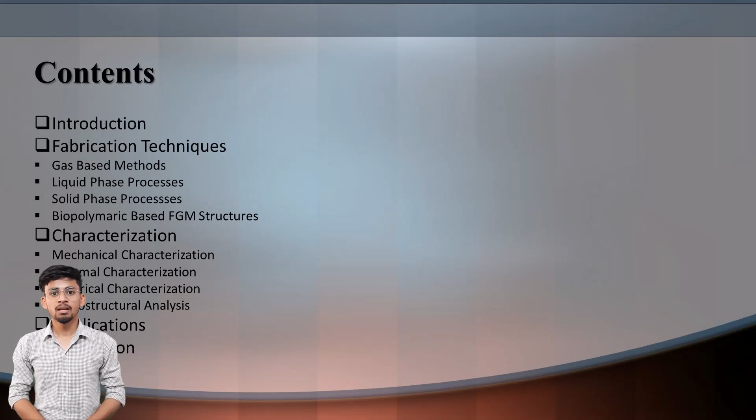Today I am pleased to be here in front of you to deliver the presentation of my seminar topic, fabrication and characterization of functionally graded materials. This is the overview or the list of contents. So let's start with the introduction and know about what functionally graded materials are.

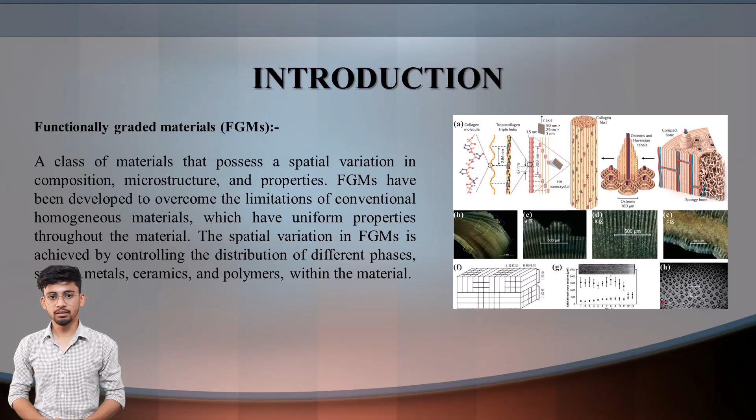Functionally graded material is a class of material that possesses a spatial variation in composition, microstructures and properties. FGMs, or functionally graded materials, have been developed to overcome the limitation of conventional homogeneous materials, which have uniform properties throughout the material. Now let's talk about the fabrication techniques to fabricate functionally graded materials. Mainly these methods are divided into four categories: gas-based method, liquid-based method, solid phase process and biopolymeric based functionally graded structures.

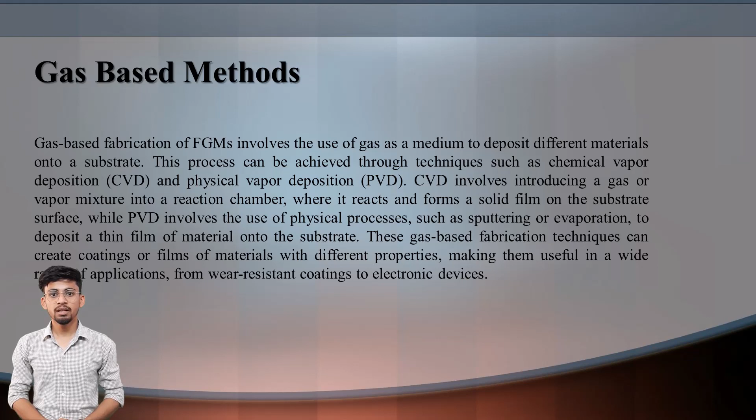So the first method is the gas-based method. In this method, the fabrication of FGM involves the use of gas as a medium to deposit different materials on a substrate. The process can be achieved through techniques such as chemical vapor deposition, thermal spray and surface reaction process. These gas-based fabrication techniques can create coatings or films of materials with different properties, making them useful in a wide range of applications, from wear resistance coatings to electronic devices.

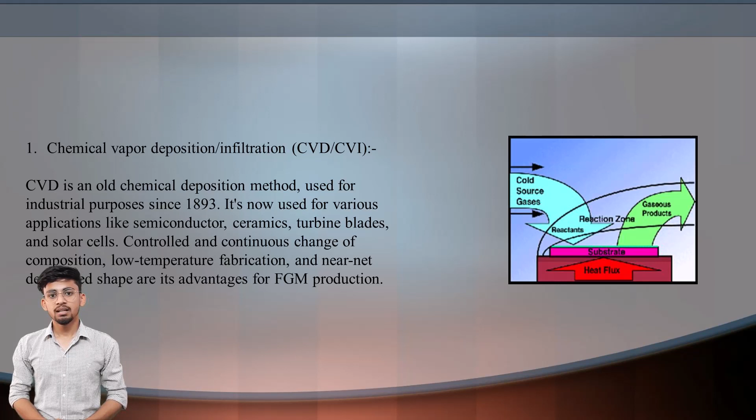Now, the first gas-based method is chemical vapor deposition or chemical vapor infiltration. This is an old chemical deposition method used for industrial purposes. It's now used for various applications like semiconductors, ceramics, turbine blades and solar cells, etc. Now the second method is thermal spray. It has a long history and is used for high temperature coating. Different materials and techniques can be used, including cold spray and functionally graded thermal barrier coating.

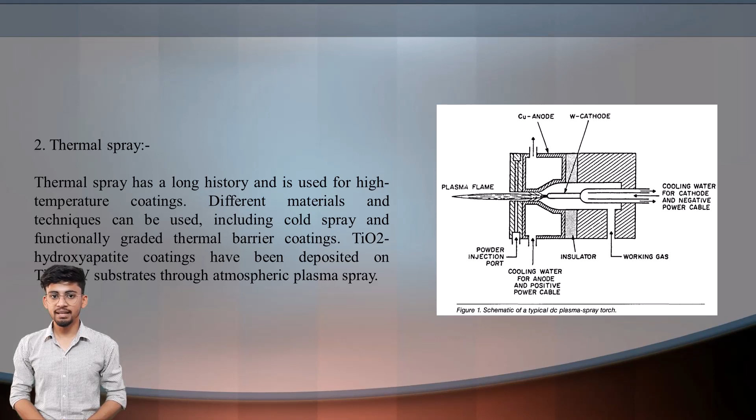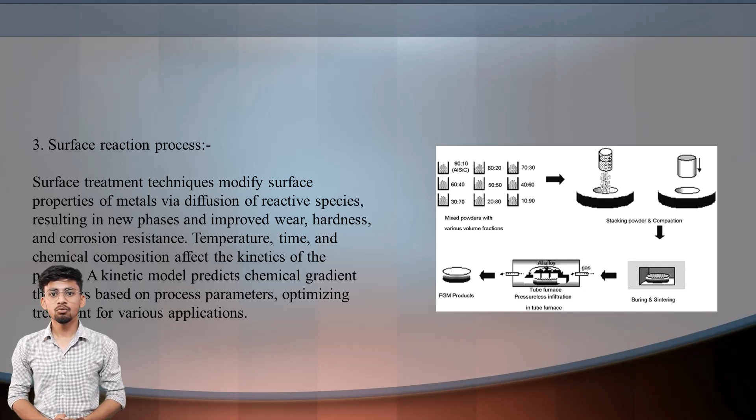The next gas method is the surface reaction process. Surface treatment techniques modify surface properties of metals via diffusion of reactive species, resulting in new phases and improved wear, hardness and corrosion resistance. After the gas-based method, the next method is the liquid phase process.

The liquid phase process is a fabrication of functionally graded material where the material composition varies gradually from one end of the component to the other. In this method, the starting materials are mixed together in the form of a slurry, which is then cast or injected into a mold. The slurry solidifies as it cools, resulting in a component with a gradient of material properties.

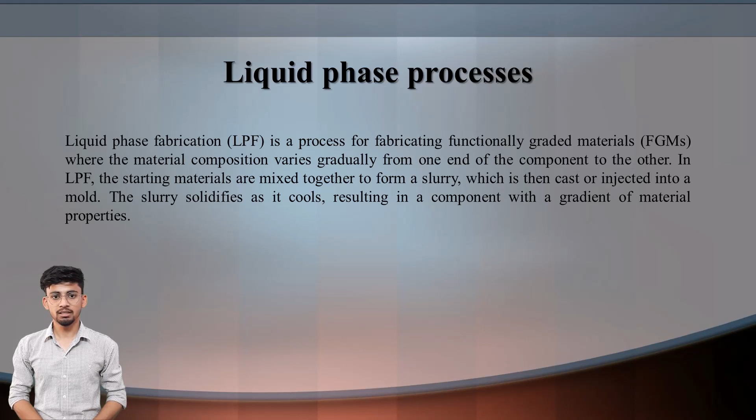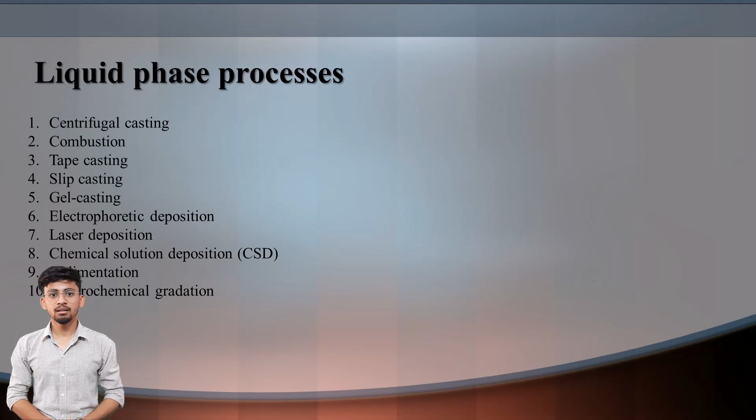Some methods involved in the liquid phase process are shown on the screen: centrifugal casting, combustion, tape casting, etc. As per the properties of the materials and the shape of the desired part, the suitable process is going to be chosen. After the liquid phase process, the next method is the solid phase process.

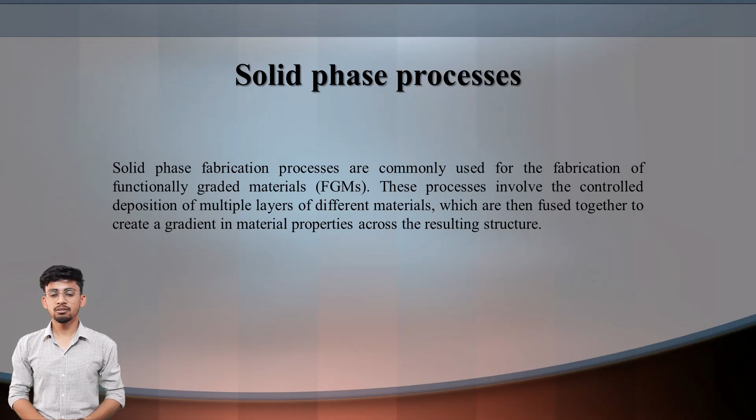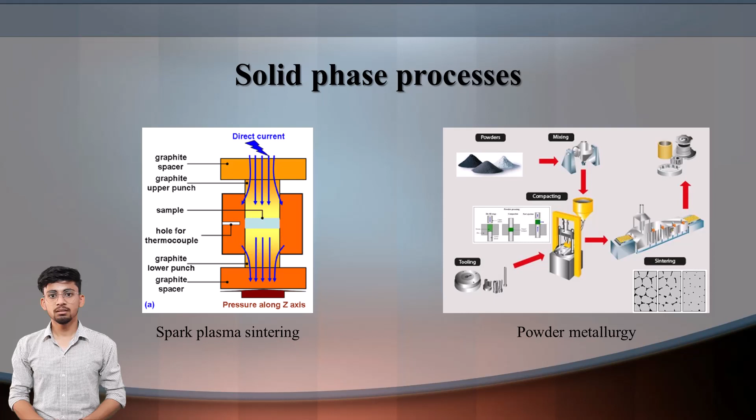This process involves the controlled deposition of multiple layers of different materials, which are then fused together to create a gradient in material properties across the resulting structure. Some methods involved in the solid phase process are spark plasma sintering and powder metallurgy. Powder metallurgy is a widely used method in industries.

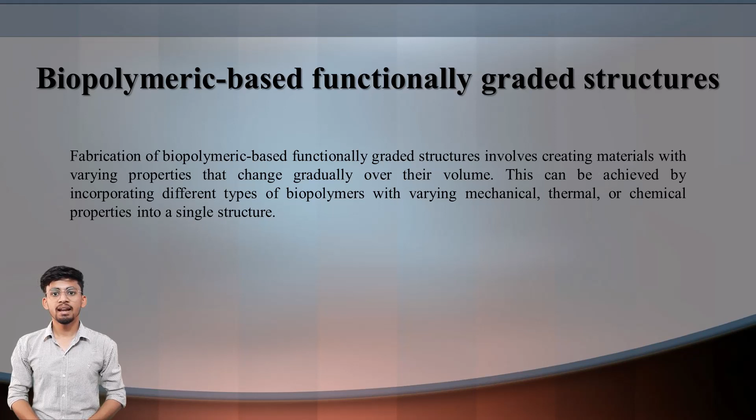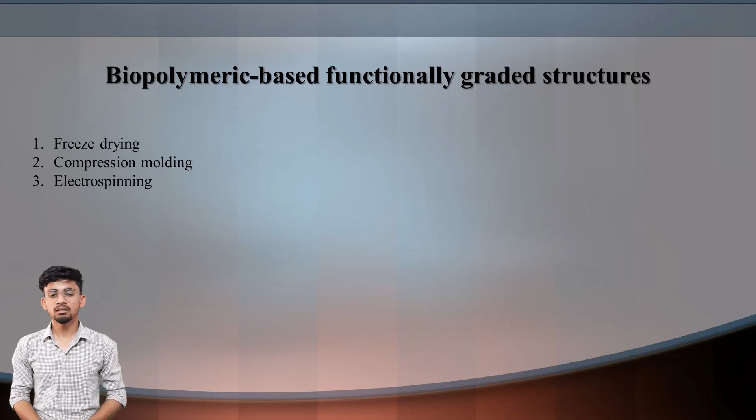Now the last method is biopolymeric based functionally graded materials. The fabrication of biopolymeric based functionally graded material structures involves creating materials with varying properties that change gradually over the volume. Some methods to create biopolymeric based functionally graded material structures are freeze drying, compression molding and electrospinning.

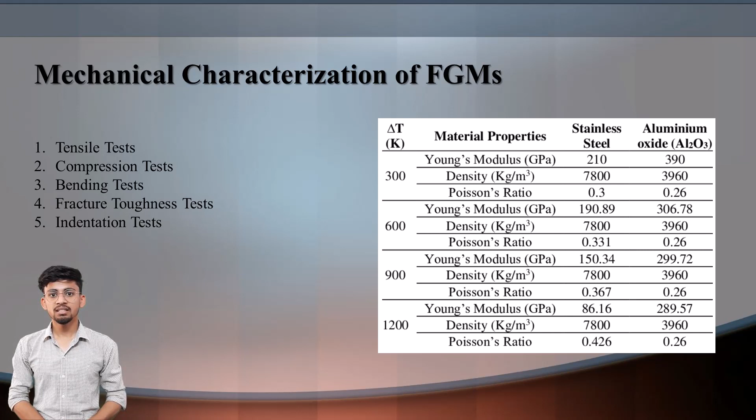Now, after discussing the methods or techniques to fabricate functionally graded materials, let's talk about the characterization of functionally graded materials. The characterization involves the mechanical, thermal, electrical characterization and microstructure analysis of functionally graded materials. The mechanical characterization involves tensile test, compression test, bending test, fracture toughness or impact test, indentation or hardness test, and other tests as per the other mechanical properties of materials.

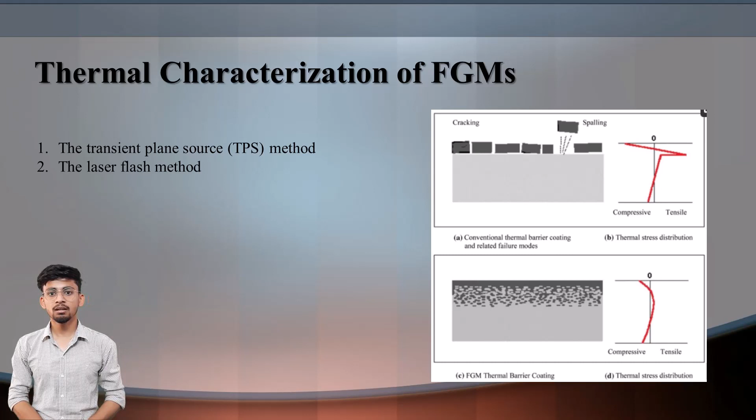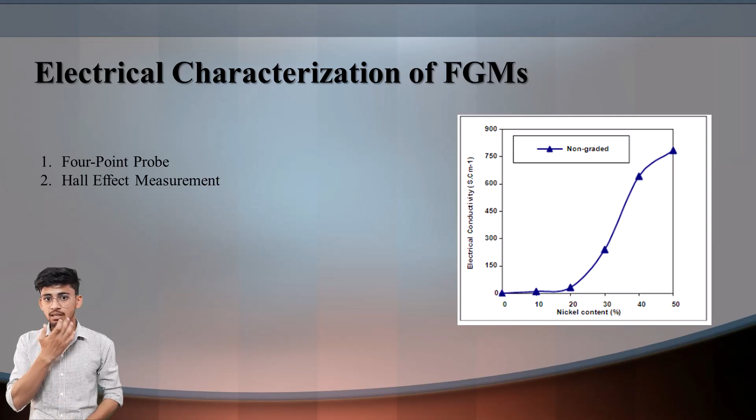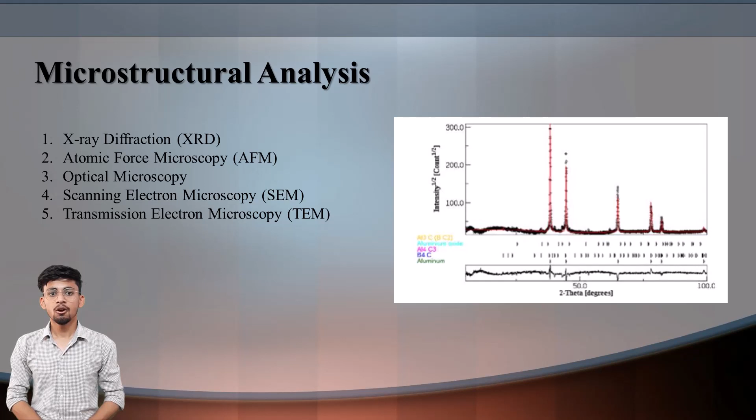Next, thermal characterization, which involves the transient plane source method and the laser flash method, which test the thermal resistance of the material. Now the electrical characterization of functionally graded material involves the four-point probe test and Hall effect measurement. These tests measure the electric resistance or the electric conductivity of materials. The microstructure analysis consists of tests to find out the molecular structure or the atomic level properties of the materials.